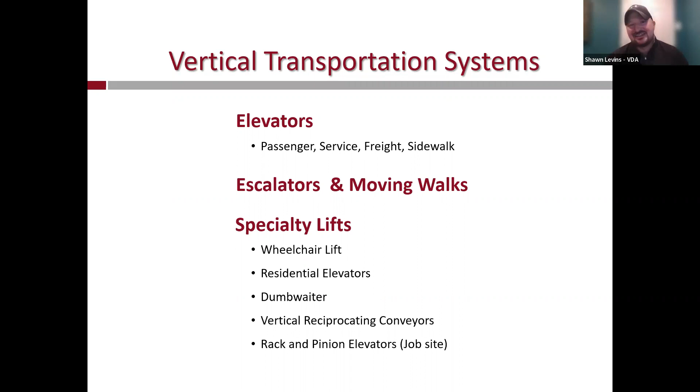All right, so going into the types of elevators, and don't worry, I'm going to share pictures of everything and explain these in better detail here. Hydraulic elevators are broken down into holed units, in-ground cylinders, and then you have your holeless elevators, right? Because somebody was like, digging a hole in the ground and putting hydraulic oil in it doesn't sound too good, so maybe we should think of something better. So they came up with the single and dual stage cylinders.

Also the rope cylinders as well, cantilever designs, which you may have not seen - they're pretty rare. Not a fan of these cantilever designs just because they're defying gravity and engineering, so they're definitely a rarity in this area. And then counterweighted hydraulic elevators, which is a proprietary type system - I'm not really going to go into it. It's more or less called the MRL, but spelled EMARALE, I believe, not MRL like the other machine roomless elevators. It's only from Mongrain Vertical Transportation, which is a Canadian company, so we don't really see that too often in this area. That was pretty much only in New York City that I've seen those.

Traction elevators - you have your geared traction elevators, which I'm pretty sure everybody's familiar with, and gearless traction elevators, which are more for your high rise. Pretty much what we're seeing installed today at 700 feet per minute and above, or building heights of around 300 feet of travel, more or less. And then the most popular, which I'm sure everybody's familiar with, in pretty much all new construction jobs these days, is all machine roomless, or MRL. But it's not technically machine roomless in Massachusetts, which I'll get to as well.

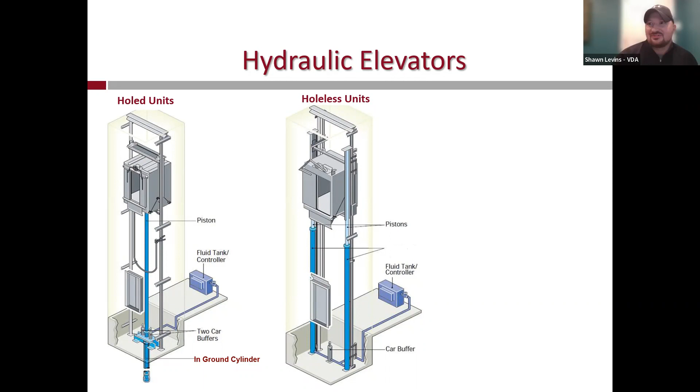Okay, so the next holeless type of hydraulic elevator is called the roped holeless hydraulic elevator. They mix a combination of traction ropes with hydraulic cylinders to gain additional travel. These can go up to 60 feet of travel, even higher by some manufacturers, though I wouldn't put them in higher than 50 feet personally.

It's another way of gaining additional travel with these elevators without going with the hole hydraulic cylinder. It's also a lot better environmentally because you're not digging into the ground, and digging that hole comes with its own problems—you never know what's going to happen down there. So the roped hydraulic is another solution.

A lot of times you'll see hydraulic elevators specified for freight type elevators because the capacities of those elevators are a lot higher, and hydraulic elevators can handle those higher capacities a lot better than your traditional MRL or overhead gearless or overhead geared.

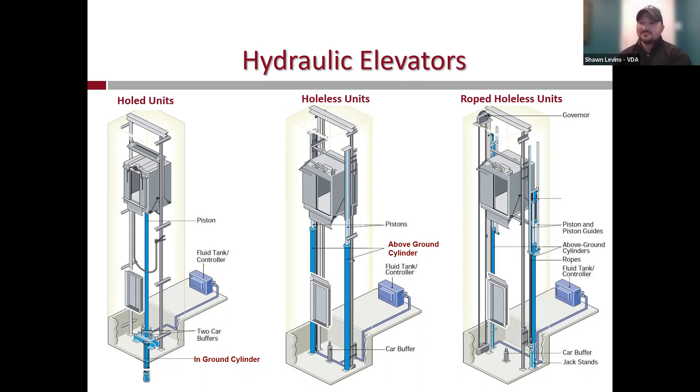Moving along, the next type of elevator system is called the geared elevator. Again, this is another existing elevator system that's in place widely throughout the area today. A lot of times you'll see these in a machine room connected with a DC motor and a DC alternating drive, so it's very energy inefficient.

It's a worm and gear drive as opposed to the new gearless, which is exactly how it sounds—more gears to accomplish one task, more or less. So it's not as efficient as the gearless, where it's just a single drive system.

These are still used today. You'll see them used for freight, basement traction elevators if you don't have the overhead, offset freight elevators and whatnot. But as far as a standard passenger elevator, they probably wouldn't be specified for anything in this local area.

Again, you have the machine located above. It can also be located in the basement, and offset is another option, but that's a little bit tricky, so I wouldn't recommend mentioning that to anybody, but they do get installed.

So again, moving forward with the traction elevator, you have the gearless elevator system, which is the newest technology. It's a drive sheave directly attached to the motor armature. It's an overhead type system, and it's the most efficient elevator overhead drive system that they have today. This is kind of where the MRL technology came from.

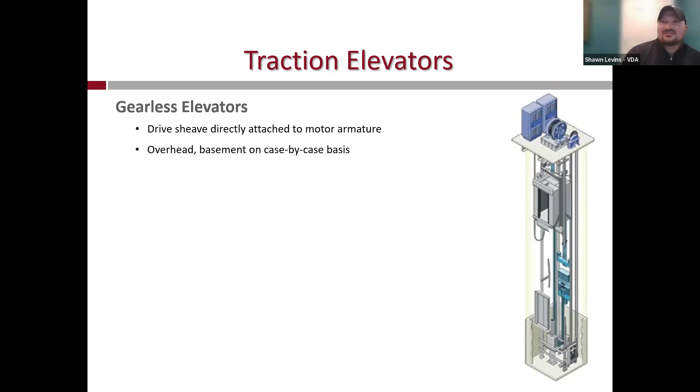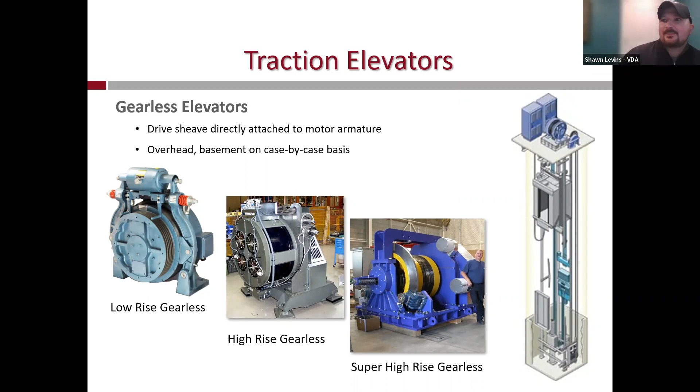Okay, now the most popular elevator, which I'm sure everybody's familiar with these days, is the machine roomless elevators, MRLs, except unless you're in Massachusetts, of course. But I'm still a big fan of the control room. They make a lot more sense than having the controller in the entrance frame.

So what they basically did is they took the traditional gearless type machines and downsized them, and put everything that was in that machine room into the hoistway, which gave it the term machine roomless. They also allowed for the controller to be mounted in the hoistway as well.

In some jurisdictions this is still allowed, mainly in the Midwest. It's banned in an abundance of jurisdictions—definitely Massachusetts, and then New York State, some areas around there. White Plains, New York kind of bans it, and New York City is a big proponent of having the machine room. California definitely, and things like that.

Again, this is just going through everything I've talked about: controller installed in a separate room. Here's some examples of what the machines kind of look like. You can see a few of the manufacturers have now moved away from the traditional steel core ropes, and they now have these belted or webbing type belt systems that they use to drive the traction machines.

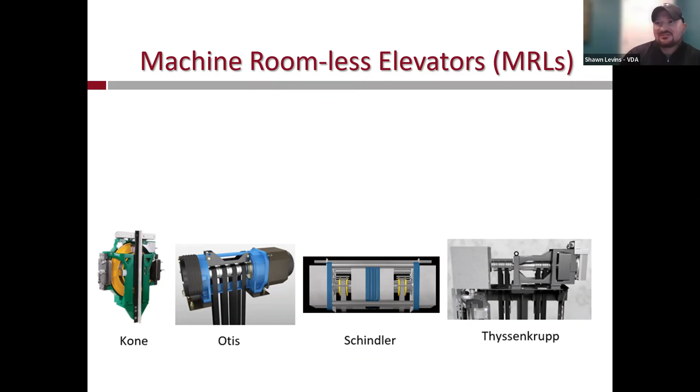And in Massachusetts, these all have to be fire rated, of course. So fire rated belts are pretty much used throughout the area. Connecticut, for a while, I was catching a few non-fire rated belts in which they wanted sprinklers in the hoistway, but in Massachusetts you're not allowed sprinklers in the hoistway, so they definitely have to go with the fire rated belts.

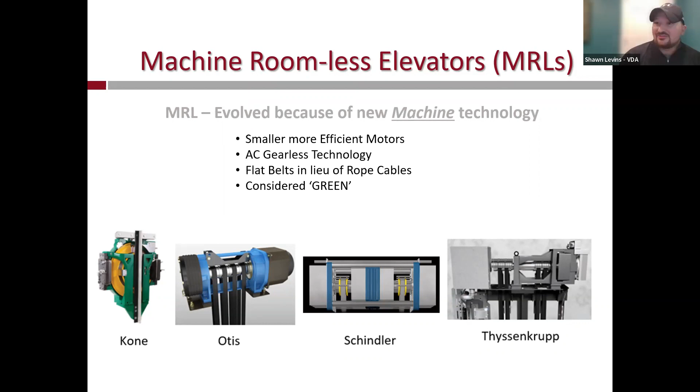Again, the MRL evolved because of the machine technology. You've got the smaller, more efficient machines for these lighter duty applications of the mid-rise and even the high-rise. They're also considered the green machines as opposed to the geared machines, and of course the hydraulic elevators.

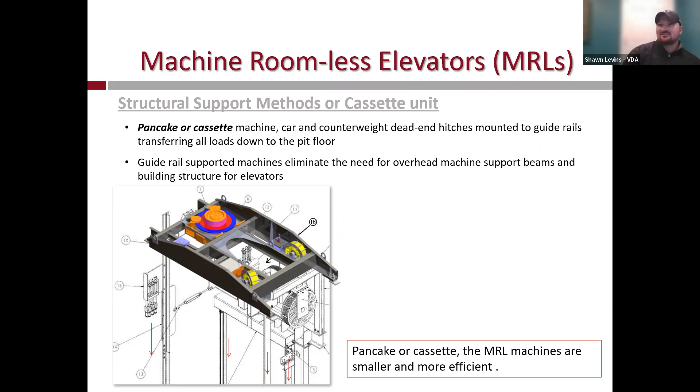This area is pretty much like an OEM dominant market, so your Otis, your TK Elevator, your Schindler, and your Kone are pretty much the dominant players for the new construction market here. You'll be seeing them pretty much on all the new construction projects.

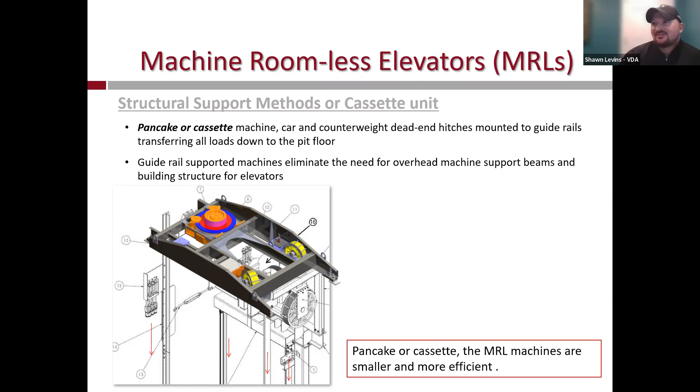And then you also have Stanley Elevator and Delta Beckwith, which are sister companies. Stanley Elevator is a sister company of TK Elevator, so they can install TK Elevator products, which is the Evolution product. And then you have the Otis Delta Beckwith Elevator, which is the sister company of Otis Elevator, which can install the Otis Underslung, the Otis Overslung, or the Otis Gen 3 Edge and Peak. They changed their name recently—they're always changing things on me. Keeps things interesting, I guess.

All right, so again, it's just going through what machine roomless actually means. It basically means that everything in the machine room is in the hoistway now, so you don't have to worry about creating that overhead machine room. You don't have to worry about providing overhead access, rooftop access, code compliant staircase to the roof, or anything like that.

This works good a lot of times when I'm doing feasibility studies for existing elevator hoistways where they want to rip out an existing machine and just put a new elevator in the hoistway, and they don't necessarily have code compliant rooftop access, which is very hard to do with an existing building, unless you're building a stair on the outside of the building, of course.

So they'll be favorable to the MRL design where you don't have to provide that kind of rooftop access. They'll usually have like a ship's ladder with a roof hatch, or the spiral staircases I've seen, all of which are not compliant at all. You're not allowed to have a roof hatch to access an elevator machine room.

Okay, some additional MRL notes. So with the MRL, with the OEM types of product lines, a lot of what their product lines are designed around is efficiency and a pre-engineered product. They have this assembly line system of pre-engineered equipment to keep cost low and provide you with a similar product to whatever everybody else is getting installed, more or less. So with that, you're not going to get too much variation. Customization of certain components is very difficult. They are very costly because they have to be subcontracted out to other vendors.

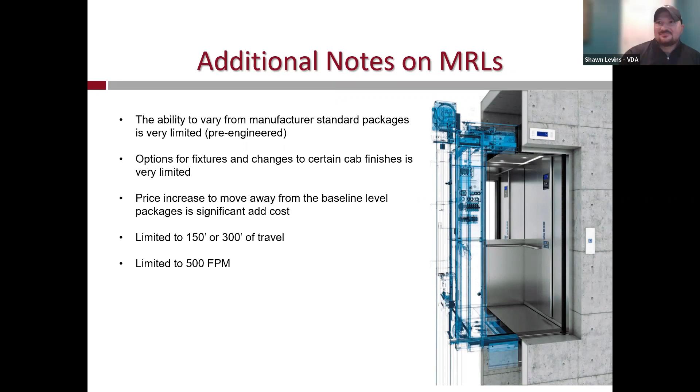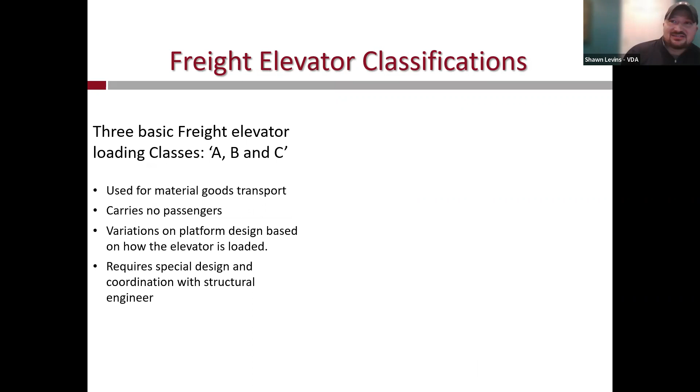Okay, so moving through to the freight elevator classifications. So you have the three basic classifications: A, B, and C. The most common one that you're going to see is Class A, of course. That's your passenger type usage. Here's a little rundown with the pictures.

So Class A and Class C3, with Class A being the most common, Class C3 being the second most common, and then you have your Class B, C1, C2. Those are more or less for freight loading. Those are not for passenger type usage. So they don't meet ADA compliance, and they're not designed for passenger type use. So they don't have the same safety features with the doors and whatnot.

You have the biparting doors. However, with the Class A freight loading, which is for your general passenger use, that's rated for the passengers. And then your Class C3 is kind of a combination between the freight and the Class A. So it's a little bit of a branch there where you're allowed more concentrated loading than the Class A, and you're still allowed passenger use, but you're not allowed to carry any forklifts or vehicles or anything like that on there, of course.

A little bit of information: Class A is actually rated on these elevators designed around passenger use. So when you see like a 5,000 pound elevator, it's actually designed around how many passengers can fit in a 5,000 pound elevator, as opposed to how much can be loaded. So when you load a 5,000 pound elevator, you're only allowed a single load of 1,250 pounds, exactly 25% of the total capacity. Whereas if you had C3 loading, what they do is they stiffen up the sills, they stiffen up the bottom of the car sling, and you're allowed a total single load item of 5,000 pounds.

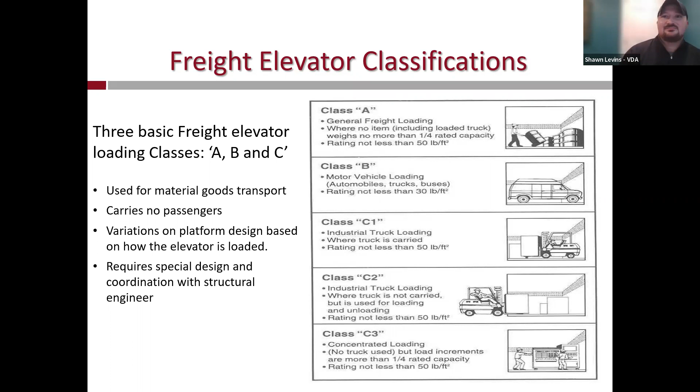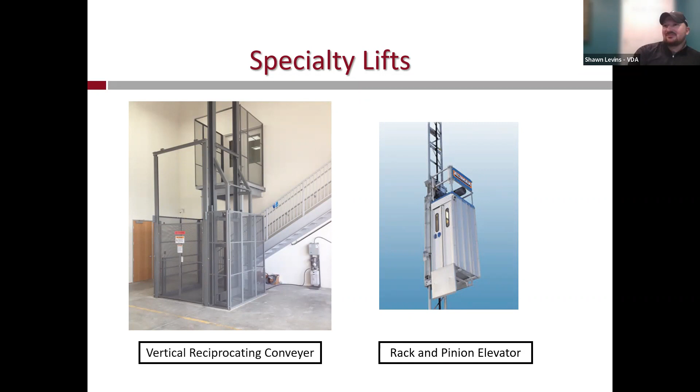All right, so just going over the elevator operation requirements and components.

Your basic elevator control operation systems are: constant pressure, which you're going to see on wheelchair lifts; two-stop operation, which is exactly how it sounds, more for a two-stop hydraulic elevator; simplex selective collective, which is your more popular one - that's if you have a single elevator serving 2 or more floors; duplex selective collective, which is 2 elevators working off of 1 riser; and automatic group, which is a group of 3 or more elevators working off of a single riser. Then you have your destination dispatch system, which some people may be familiar with. It's becoming more popular throughout the Boston area, especially in office buildings - pretty much all office buildings are being installed with that today.

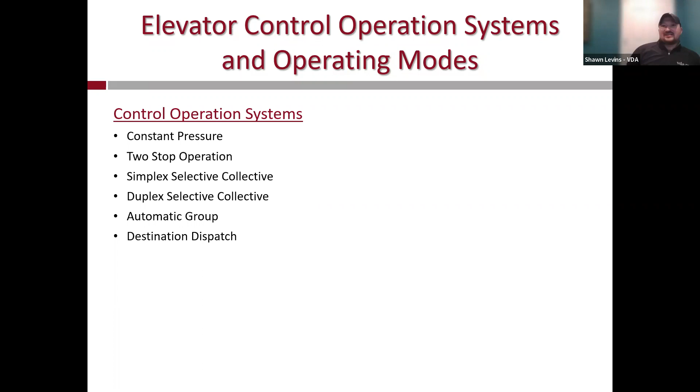Various operating modes are: attendant service, which I don't think you'll ever see unless you're on an older freight elevator or something like that; independent service, which is provided for the building to take that elevator out and use it for service needs as required; inspection service, which is for the elevator mechanic to run that elevator at a certain speed - it's basically the same as independent service, so most of the time you'll just have the independent service switch in there, they never really install the inspection service; firefighter emergency operation, phase 1, phase 2, again code required operation, I'm sure everybody's familiar with that; and swing car operation, which is very popular nowadays, especially with the requirement for the 2 fire service access elevators.

So frequently what they're doing is they're putting two service type elevators in your main passenger core, and you want to be able to utilize those service elevators for what they're designed for, which is service type use. So they'll be on what's called a swing car operation, which will pull one of those cars out of that bank and operate on a riser separate from the group riser. It's usually on a key switch, designed for building use only. When you activate that key switch, the riser call buttons will pull that car out of the group, and it'll operate independently of that group.

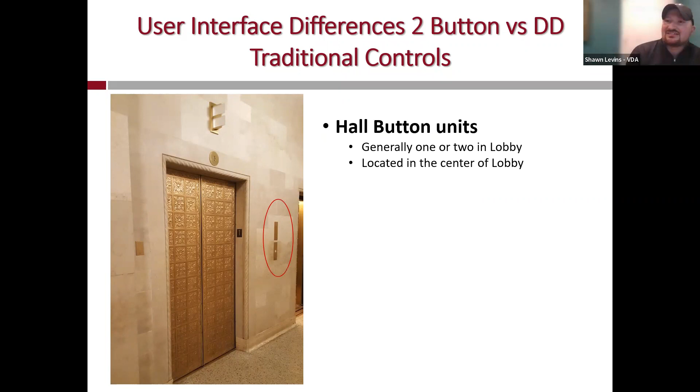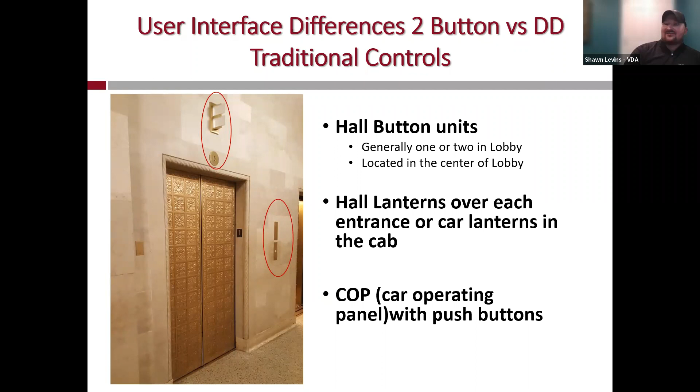So this is just going over the interface to show the difference between conventional dispatch and destination dispatch. With your conventional dispatch, you have your regular hall push buttons, so you have to physically touch that push button to call the elevator or register a call. Then you either have the hall lanterns or car lanterns light up, which achieves your ADA provisions by providing a direction of travel. Inside the car operating panel, you have the push buttons to activate which floor you want to go to.

And again, that's the most common type of elevator control system. Calls are placed at the push button station in the hall. Destinations are chosen from inside the elevator. You can have multiple people going to different floors and they can each select which floor they want to go to.

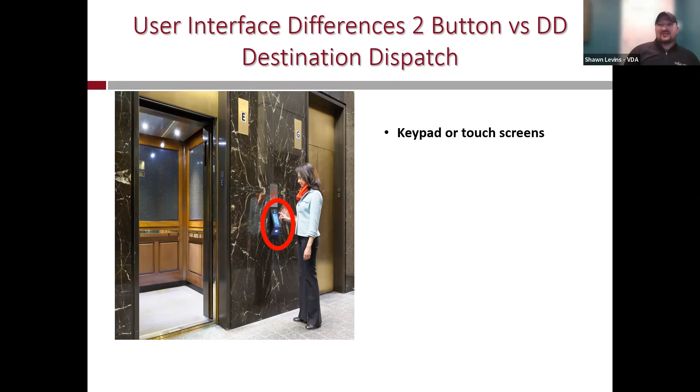Versus the newer, smarter technology, which basically consolidates people going to similar floors. This is called destination dispatch technology, which consists of this keypad. It's more or less like an iPad touch screen. They can even operate off of just a card swipe where you can swipe the card and it'll take you to your pre-programmed destination floor. If you needed to change it, you can hold the card over the card reader device and it'll allow you to select from different floors. So it's kind of like a touchless technology, more or less.

So we saw a lot of people interested in this type of technology during the wake of COVID and whatnot. But once they saw the price tag of adding destination dispatch to their systems, they kind of deferred from it and went back to the conventional dispatch. However, if they had an office building over 10 floors, they were probably putting in this system just because it's becoming the norm, especially in the city of Boston.

Your typical floors have fewer units because you're not seeing as many people using the elevators at the same time as you would at the main lobby, where you'll have that heavy influx of people at one point in time. Your main lobby is going to have as many as 3 to 4 devices, depending on how many elevators you have in a bank and how spread out they are.

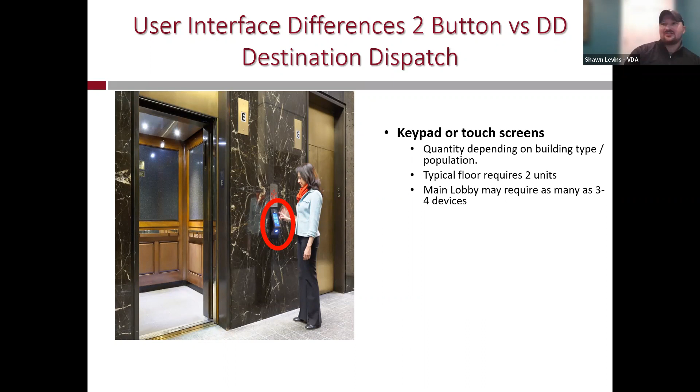The main goal when designing for these destination dispatch fixtures is to not allow for a backup of traffic. If somebody has to wait in front of that push button station and there isn't one actively available, and then you have people backing up on top of that blocking elevator entrance doors, it creates a traffic jam in your elevator lobby, which is not good from a traffic analysis standpoint or an experience standpoint. So you definitely want to try to avoid that at all costs.

Another item that comes with the destination dispatch system is your static or dynamic car identification system. It's not code required to have these light up, it just has to be located adjacent to the elevator entrance frame. The code doesn't define too much criteria for these, but I think they should probably light up since that's a lot easier for people to see. However, the standard ones from the OEMs tend to be pretty atrocious looking, so a lot of times architects will come up with their own custom signage posted above each elevator entrance landing. It's also cheaper that way, since it takes that scope out of the elevator contractor's scope.

Another additional item is your car jamb registration indicator, which is for your ADA provisions, with additional braille signage to indicate which elevator it is. The biggest issue is people press the destination dispatch touchscreen and then forget which elevator they're going on. Everybody's human, they've got a million things on their mind, especially these days. So you want to make sure that elevator is adequately provided with signage that indicates which floor that elevator is going to on the jamb. When the doors open, they'll see the elevator is going to their indicated floor, giving them confirmation, as well as the elevator identification number. You also want additional pads there, because frequently with turnstiles, people swipe their card, forget which car it was read, so you want additional stations so they can press the button again and register another car.

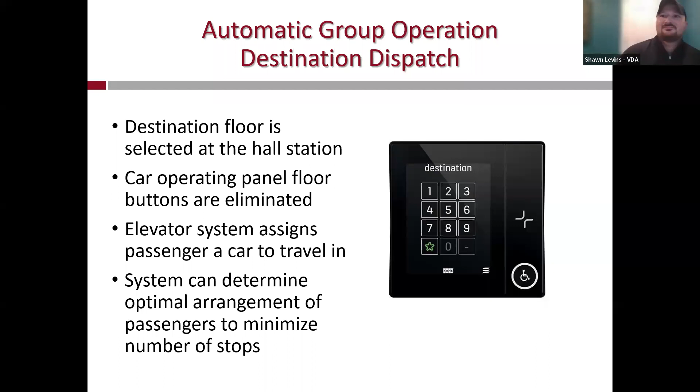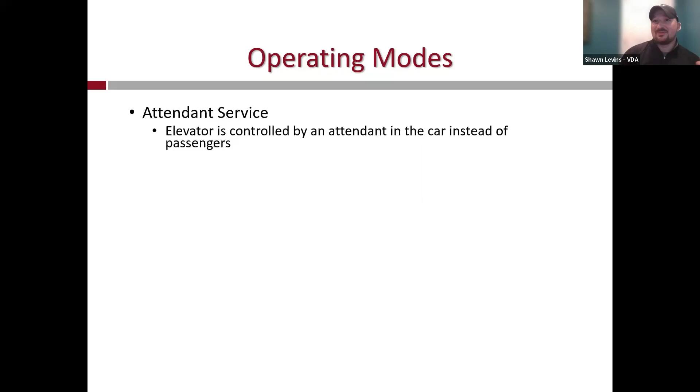Now going through the various operation modes. Attendant service is exactly how it sounds, a car controlled by an attendant, but it's very rare, you won't see that in any passenger cars. Even when the elevator is used for construction, that's not attendant service, it's more like an attendant operating the car, but it doesn't have the push buttons - he just has the car on independent service and operates it that way.

So that's independent service - it's a constant pressure type operating system, so you have to hold down that button to get the car to operate. I don't know if anybody's seen the attendant on construction use elevators do that, but if you're wondering why he's holding down the button, that's what he needs to do to get those cars to respond.

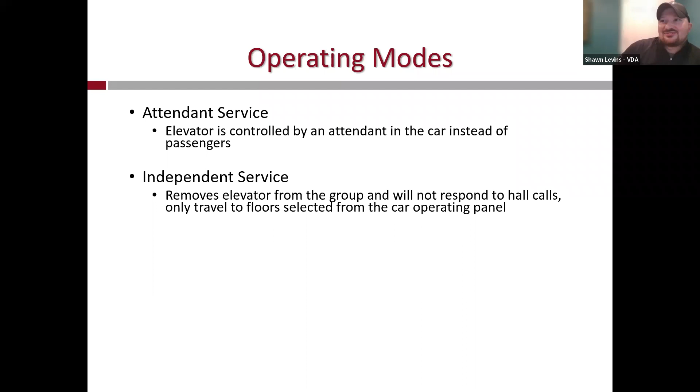Inspection service is basically the same thing as independent, it just limits the speed a bit more, and again that's used for technicians. Your hoistway access operation is used for technicians working on the elevators - for their safety, they want to make sure they can access the elevator pit, the elevator overhead, and ride the car up and down the shaft as needed. That's provided through a key switch at the terminal landings, your lower and upper landings.

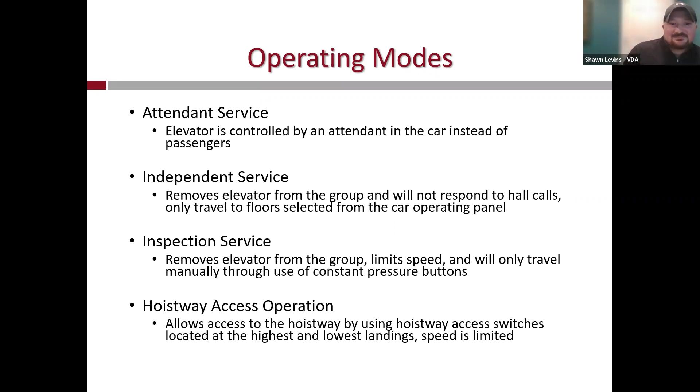But definitely not for regular passenger type use. Swing car operation, which I discussed, will take an elevator out of a group so that we can use it on a separate set of risers. It's good for when you have a service car and a passenger bank, or if you have an elevator serving another floor. Another way around this is to install a destination dispatch system.

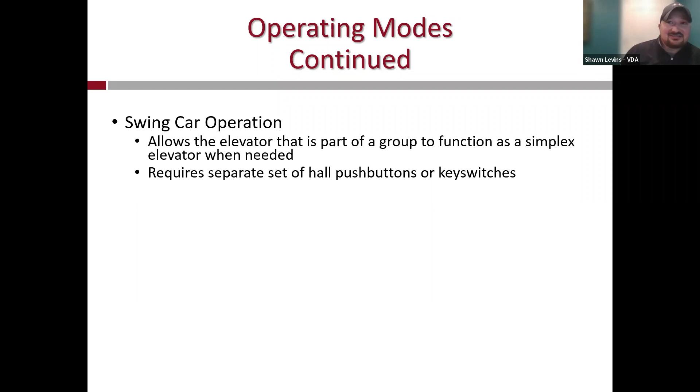That is another option. Executive priority service - again, I went over this - provides express mode to your destination floor, generally used for VIPs and whatnot. Not very popular, I haven't done too many of those around here. And your hospital emergency service operation is required on one elevator that serves all floors of the building for every single new construction building, and if I can, I will put it on existing buildings as well.

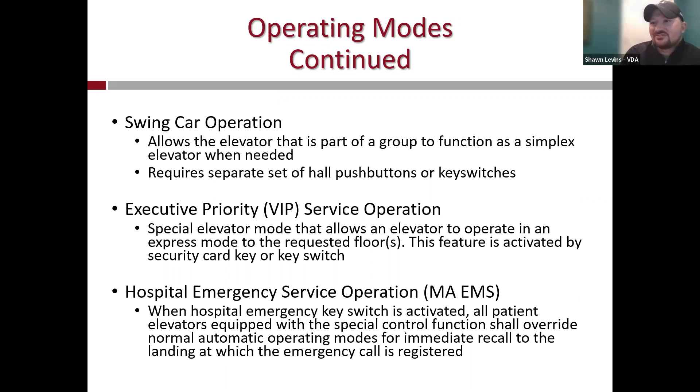So this is going through your firefighter's emergency operation, which is a code requirement. It's divided into phase 1, phase 2 operation. Phase 1 being at the main recall call switch, phase 2 being at the car station.

I also like to put the phase 1 call switch in the fire command center for all buildings, especially if you have a high rise, or what I'd like to define as a building code high rise, which is above 75 feet. Not the Massachusetts high rise above 70 feet.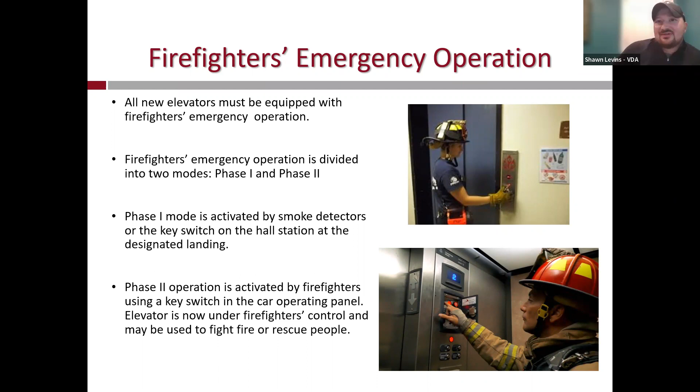And a big thing that came in with the 9th code edition, which I'm sure a lot of architects felt, is the fire service access elevator requirements. Which is required for a building with an occupied floor more than 120 feet. You need 2 fire service access elevators that service all floors.

And hopefully they change that. I know they're looking in the 10th to change it to the below garage levels, or from the lowest floor from fire department access, so you don't have those fire service access elevators serving the garage areas anymore.

It does make things a little tricky from a traffic analysis standpoint, because you're kind of creating multiple lobbies. Generally with a traffic analysis, you want to have that single lobby at floor 1. You don't want the elevators going down into the parking garage and picking people up. From an efficiency and traffic analysis standpoint, it definitely works a lot better that way.

All right, and here's the code section I was discussing. Every floor of the building—I've seen the later versions of the code and they seem to have changed that, which is good. It's definitely coming up on a few of my projects that they're expecting construction under the 10th. They're trying to predetermine what that's going to be and try to save some costs on those service elevators.

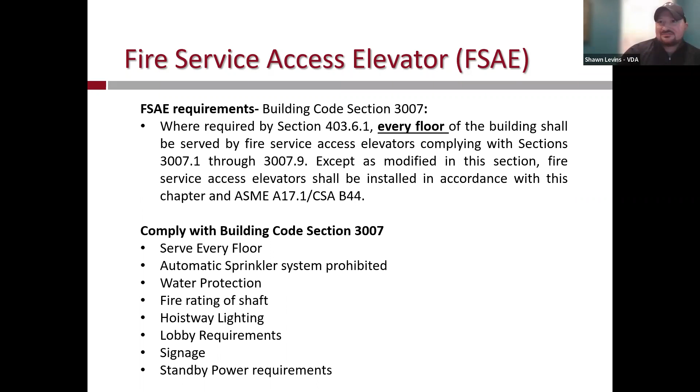Going through the minimum ADA requirements—so it's pretty much a 2,000 pound capacity, or as the industry says, 2,100 pound capacity. Probably won't see them that small here. Their 2,500 pound capacity is more for the smaller type elevators.

But because Massachusetts requires the stretcher requirement for every single elevator, you're pretty much locked into either the 3,500 pound car or the 4,000 pound car. And then, sorry, I skipped over that one—for existing construction, it's a little bit different. You're allowed a little bit more leeway there, but the clear inside dimensions cannot be smaller than 48 by 48.

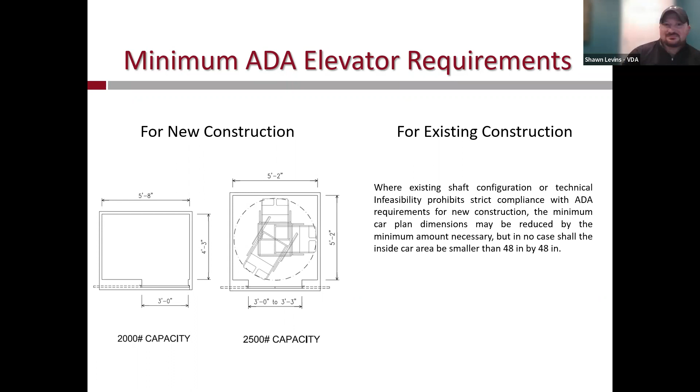And here's a basic diagram of what the stretcher handling elevators kind of look like. So you have your basic 84-inch stretcher compliant elevators.

Which are your 3,500 pound and your 4,000 pound elevators. A lot of architects like the center opening doors. I like them too, especially because they're the fastest operating doors in the industry. So from a traffic analysis standpoint, they open and close the fastest, and that's going to really affect your floor to floor times and make that elevator a lot more of an efficient driving system.

So the 4,000 pound car is definitely the more popular choice. And if you wanted to just get away with a smaller car, which is roughly exactly 1 foot less in width, that's your 3,500 pound car. So it's 6'8" for the 3,500 pound car in width, and then 7'8" for the 4,000 pound car in width.

And then the 76-inch stretcher is not around at all today. I haven't seen it in a while. That is not allowed for new construction under most areas. I think Maine actually has one area where they still fall under the 76-inch stretcher code, but I'm sure they're going to update that soon enough.

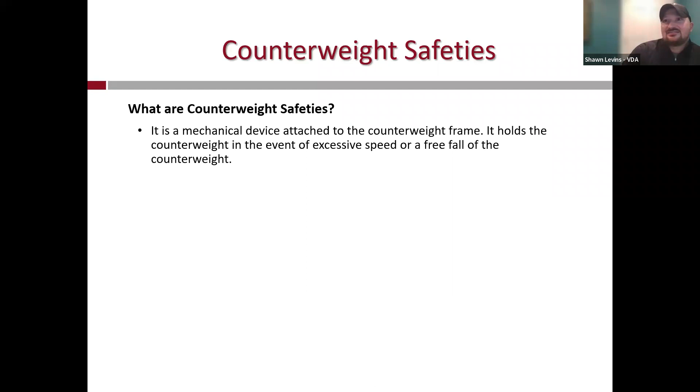However, when you do provide the counterweight safeties, one thing to note is that it does add dimensional increases to whichever side the counterweight is on. So it's either side counterweight or a rear counterweight, whichever is being designed, is actually going to increase the size of the hoistway. And then some manufacturers require actually a deeper pit or more overhead to account for the counterweight as well.

And then in addition to that, you're also going to have additional loads that are going to transfer down those counterweight rails when that safety is applied to the counterweight, that are going to transfer down to the pit, that need to be accounted for structurally as well. If you're working with a very tight pit with pile caps and everything else, that can sometimes be an issue, because structural is not necessarily keen on seeing that.

It's not too common to have the counterweight safeties. They're usually just used to seeing the safeties applied to the car rails. So that does come up from time to time.

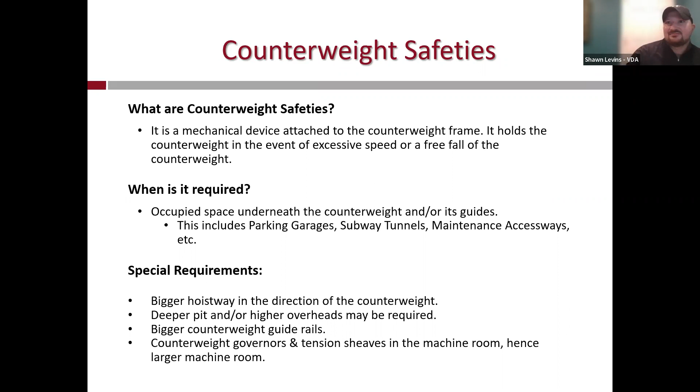All right, getting into elevator cabs. I'm just going to go through all these sections here just to talk through them real quick. So I think the best way to kind of go over the elevator cabs is to talk about what's actually part of the pre-engineered products from the OEMs, and what can be easily customized. I get this question a lot from the designers on the various projects that I work on.

So the front returns, doors, right? It's a shame you can't really see my mouse here, but front returns and doors and transoms are what's comprised of the car station. So it's basically the front of the elevator, and this is what's missed most times when you provide an architectural drawing. People tend to forget about this wall because they think of the cab in terms of the 3 walls, or 2 walls if you have a front-rear opening, and then just the ceiling.

However, this is the hardest part to customize from those manufacturers. It can be done, you can do like a powder coated finish, or you can get custom metal, stainless, bronze. A black and stainless steel is another popular one.

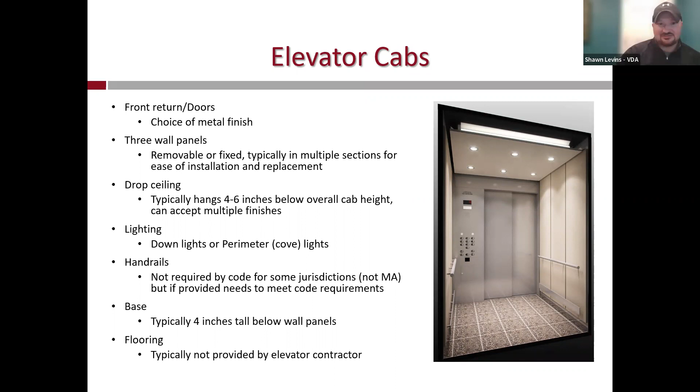All right, moving along with the car operating panel. A big pet peeve of mine is this no smoking engraving on these car operating panels. They're definitely not required. You're not allowed to smoke in the building these days, so why would they have it on the car station? Every single job that I do, that no smoking sign ends up on the shop drawings, and I usually mark it up to be removed. I think it looks much better with a cleaner look, as opposed to having that big ugly no smoking sign, especially if you're paying for this expensive elevator. You don't want that big ugly thing sticking out there.

Another component of it is the car position indicator, right? So you see that red arrow with the number on it. That's your position indicator, determining where the car is in the actual hoistway and with regards to the elevator landings, right? That's all required by code.

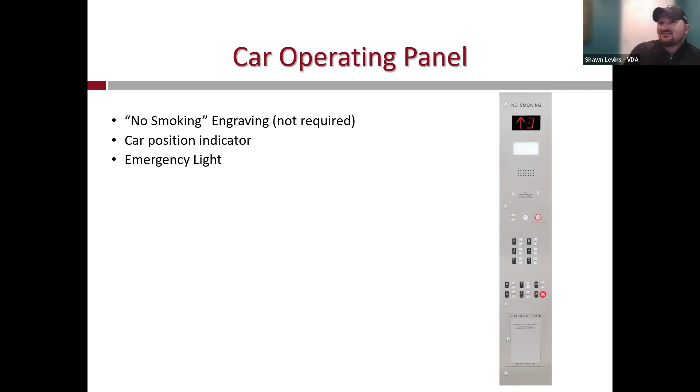The same with your emergency light. Some places you can get the emergency light in the actual ceiling lights, which again provides for a cleaner COP panel. It's a little difficult from the OEM, so we don't see that too often around here. Some of them have kind of a slimline light that doesn't look as bad as that one, but generally they're all provided in the car station there.

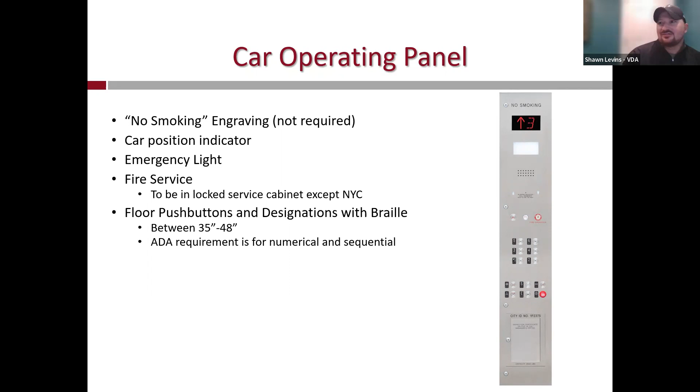You have your fire service cabinet. This one appears to be an older generation car station that they're showing there, because you need the additional cabinet for all those key switches and whatnot.

You have to update that, but in addition to that, you have your floor push buttons, right? Braille, which is required per ADA. Your push buttons are required to be at certain heights, certain reach requirements, 35 inches to 48 inches, right?

And then Massachusetts specifically, you have to have a 35 inches on center to the car alarm button, and also the car stop switch, which has to be keyed. Door open and close buttons. Sometimes you'll see a door hold button.

It usually tends to mess up the layout of the buttons, so I try not to put the door hold button on a lot of my jobs. It kind of ends up being this one single odd button that will mess up the nice layout there. So they tend not to go on there. I don't think they work anyway. Every single one that I've ever tested usually isn't hooked up. So I think it's just for people to pound and hit on to make themselves feel better about the elevator doing something right.

Emergency communication and alarm button. We talked about that. So the alarm button has to be 35 inches per Mass. And then your emergency communication button, which is basically the phone. Everything's wireless communication now with the phone integrated into the car station.

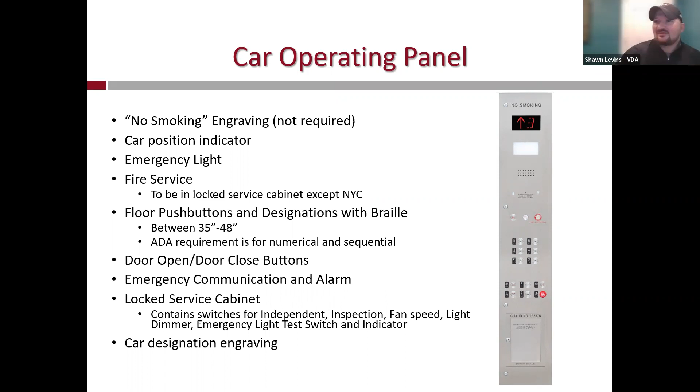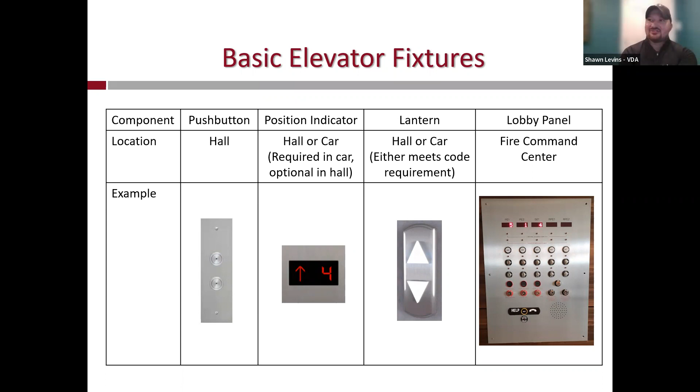Next is the fire command center panel, generally provided for elevators in buildings above 120 feet of travel, or if you have multiple elevators, multiple banks, emergency power, a lot of stuff going on there, we'll usually always spec that fire command panel. That's going to contain your position indicators, your indicators on emergency power, whether the car is operating on emergency power or not. If there's multiple cars within a bank, it'll allow you to switch between those banks for the emergency power. You'll also have your fireman's phase 1 emergency service. Frequently, I'll put the car to lobby key switch on there so you can call the elevator down manually if you want. And then you also have your car at lobby indicator light.

All right, how are we doing on time here? Pretty good, right? Do we have until 10? Okay, yeah, we have until 10. So you've got a little bit of time still, Shawn.

All right, so going over the basic elevator applications, capacities, and speeds. Your passenger elevator capacities, your standard passenger elevator, generally used for passenger type usage, for moving large amounts of people, not used for service type usage and whatnot. That's your 2,000 pounds to 4,000 pound type elevators, standardized throughout the OEMs. And then you have your service elevator capacities, which start at 4,500 and go all the way up to 5,000 pounds, and then 5,000 pounds AIA if you need that extra foot. The extra foot helps out frequently with electric bikes these days, they seem to be like 9 feet in length, so you definitely want to spec that larger elevator.

Hydraulic elevators are limited in speed, 50 to 175 feet per minute, they don't go too fast. Your gear traction elevators go 150 to 350 feet per minute. MRL speeds go 150 to 500 feet per minute, 500 feet per minute is kind of where they top out. And then your gearless traction elevator systems go from 500 all the way up to 2,000 feet per minute.

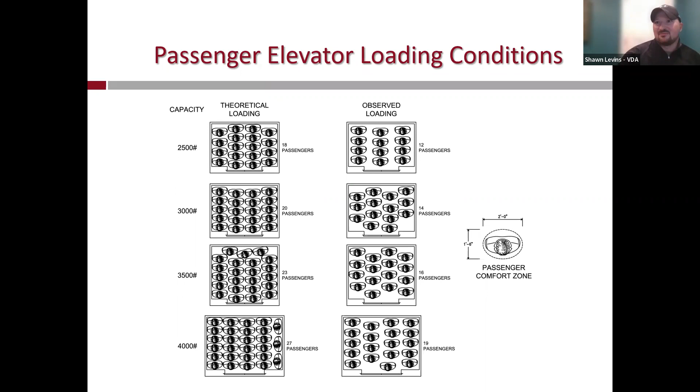So the capacity isn't necessarily how much weight can be handled by the elevator, it's how many passengers can actually fit in the elevator. They use the capacity divided by 165 pounds, and that's kind of where you get the rough estimate of how many people are going to be in there. I'll get into this a little more when we talk about the traffic analysis.

So the hydraulic elevators definitely have their use in the market. However, it's kind of like a dying market trend. A lot of people are moving towards the gearless, moving towards the MRLs. The cost of the MRLs these days versus the hydraulic elevators is about one and the same. There's not much difference between a standard holeless hydraulic elevator and a 2-stop MRL elevator.

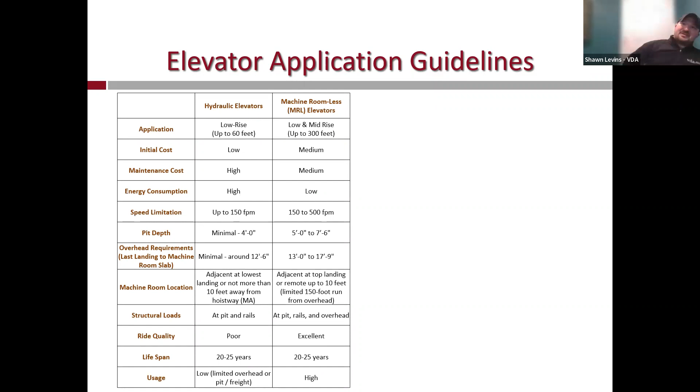Comparing that to the machine roomless elevator, I can go 150 feet per minute to 500 feet per minute, up to 300 feet of travel. Your pit depth and overhead, of course, is going to be increased a little bit more. However, that's generally not an issue for most applications. If you do have an issue with overhead and pit depth, there are options. There's something called a collapsible toe guard, which you can install on the machine roomless elevator. Some jurisdictions like Connecticut actually allow Otis Elevator to install a 4-foot pit on their MRL traction elevator. Not here in Massachusetts, of course, but there are some available options there.

Then you have your gearless traction elevators, which are more or less used when you get into that 700 feet per minute that you need to meet the traffic analysis demand. So if you don't have enough elevators, or can't provide enough in your core, and you need that extra speed to get everybody moving throughout the building, this is where the gearless traction elevators really stand out. They're used for freight type usage, higher ranges of travel, these higher buildings above 300 feet for high-rise buildings, which we don't really see too often here.

And then you have your gear traction elevators, which are generally used for your freight, low rise, 150 feet per minute. Some manufacturers, or some clients, actually prefer the geared and the gearless elevators, so you'll see them spec it. They don't like the MRL, the OEM type equipment. They want to go with what's called non-proprietary in the industry.

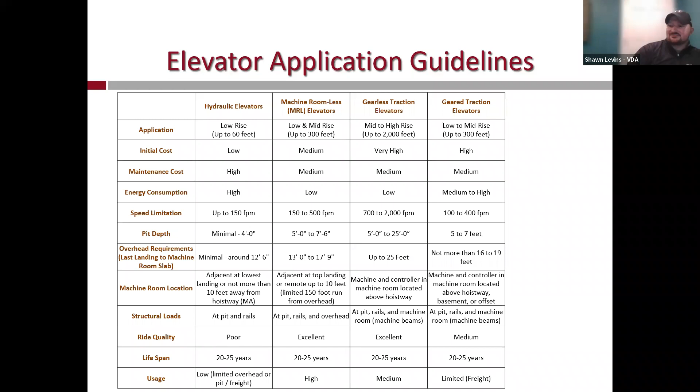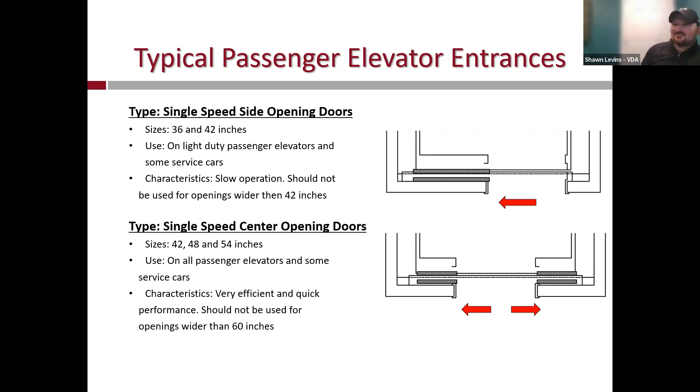This is going through the passenger elevator entrances. These are your two basic types of entrances, your 36 and your 42-inch single speed side opening doors, and then your 42, 48, 54-inch center opening doors. The industry standard though is the 36 and the 42 side opening doors, and your 42 and 48 center opening doors. The center opening doors are probably the most popular, because they're the fastest in the industry, so from a traffic analysis standpoint, they definitely stand out.

And then you also have your 2-speed side opening doors, 2-speed center opening doors. Generally, the 2-speed side opening door is popular on your 4,500, 5,000 pound AIA type service elevators. The 2-speed center opening doors you won't see unless you're working with a custom type of elevator, to get the wider elevator doors.

And then if you want to get really creative, you have something called the 3-speed side opening doors, which I don't think anybody's seen here, and I definitely would not recommend, because they look like a mechanical nightmare. I've only used them in special case by case scenarios, where I've had elevators too small, and too small of a shaft that can actually fit the 2-speed doors, so I have to use the 3-speed doors. They do not work well at all. You have a lot of issues, a lot of downtime on the elevator. I haven't seen anything like that around here.

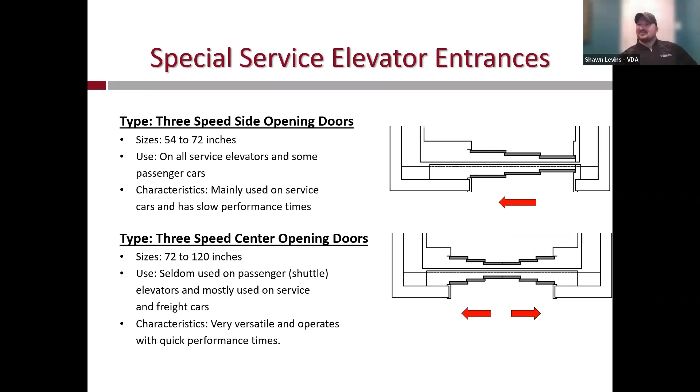But there are some applications, mainly in New York City, when they were building up those rundown areas. A lot of times they didn't want to replace these elevators, so they were stuck with the smallest elevators. You can barely fit a single person in there, and they have to meet passenger requirements, so you have to stick those 3-speed doors on there. But I wouldn't bring them up though.

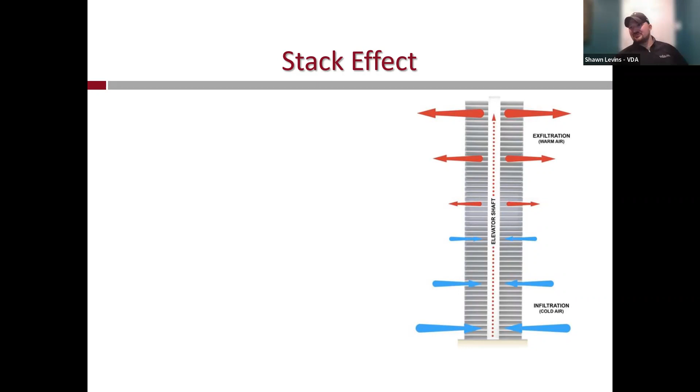All right, so here we're going over some building considerations. A big thing you may have come across is what's called stack effect. It's basically the cool air coming in and the warm air trying to get out of the building. It creates a lot of chattering of the elevator doors and degrades your elevator ride quality, because it creates too much pressure within the elevator shaft.

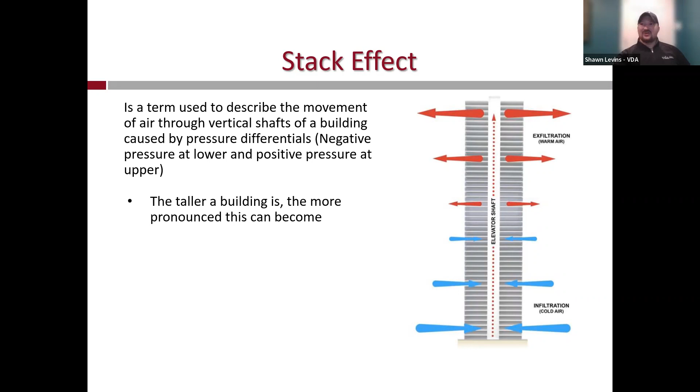It's basically that movement of pressure - negative pressure at the lower levels with the cool air, positive pressure at the upper levels. It's more pronounced the taller the building is. I haven't come across it too much in this area, but the buildings are getting higher and higher around here, so you get greater temperature differentials.

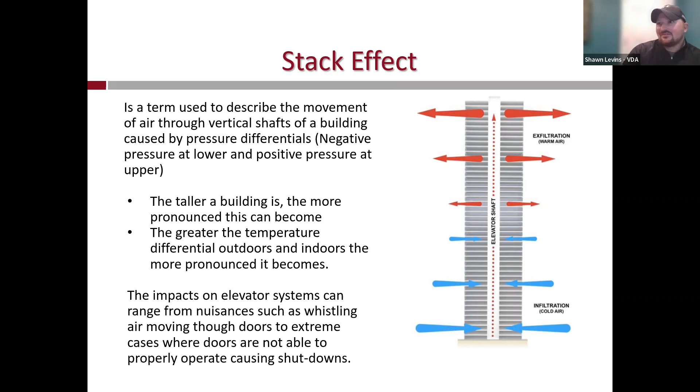You'll get that whistling sound, again the chattering of the doors and whatnot. In some cases it can actually be so bad that it'll shut down the elevator, because the elevator is moving too much to where the safety devices can't register or activate correctly. And that causes issues.

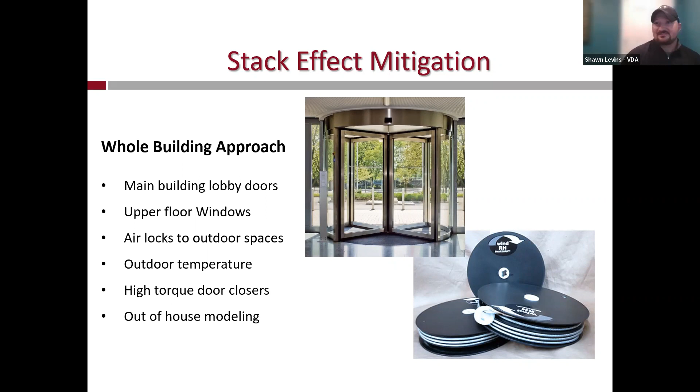The easiest way to prevent this is to have those revolving type doors there at the lobby. So you don't want any open windows or anything like that at your main lobby to mitigate that cool air from coming in and taking over the building. That's the purpose of airlocks to the outside there. You also want to limit the open windows on your upper floors as well.

The second item is what's called the piston effect. Again, this is another high-rise application where you see like a single or even a duplex elevator within a single shaft. As the elevator moves through the shaft, it creates a piston effect, where it's pushing a lot of that air through the shafts, causing chattering of the doors, the elevator to act erratically, and degrading your ride quality, because that air is trying to escape as the elevator pushes through, similar to how a plunger works through a shaft.

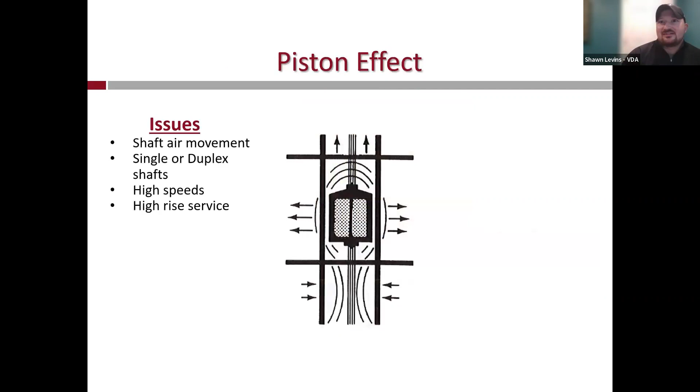Sorry, went back there. Again, that's for high speed - whistling through the entrances, noise, degraded ride quality. A way to mitigate that is to create a larger shaft.

It's pretty common - not so much anymore, but before the two fire service access elevator requirements - you just had the single service elevator, the fire service access elevator, for a really tall building, because it's generally separate from your passenger elevator bank. You'd get this condition where you'd have this single elevator going all the way up 300, 400 feet of travel, and then trying to escape all that air.

So a way around this is to oversize the elevator shaft, and then provide relief vents throughout the shaftway as the elevator goes through.

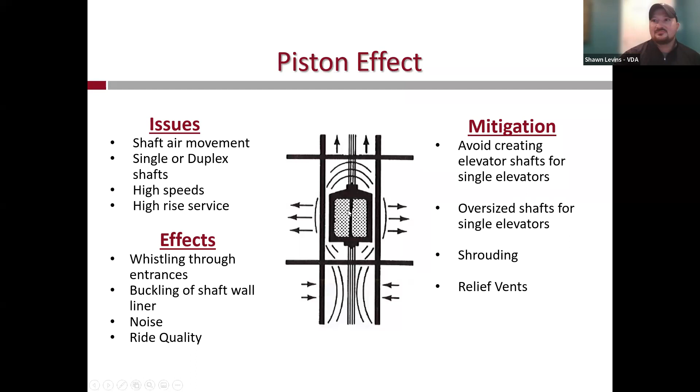Sorry, another meeting popped up here.

All right, so wind sway is another condition. Again, we generally don't see it here - we don't see buildings in excess of 450 feet too often here.

So basically, a way to mitigate this is the elevators are provided with sensors to compensate for the wind sway of the building. Or if there's a very windy day, it'll actually shut down the elevator, or shut down a number of elevators, so that the elevators can operate correctly.

Every day in Massachusetts seems to be a windy day, apparently. So it would be pretty common if we had these tall buildings here, but luckily they're not too common here.

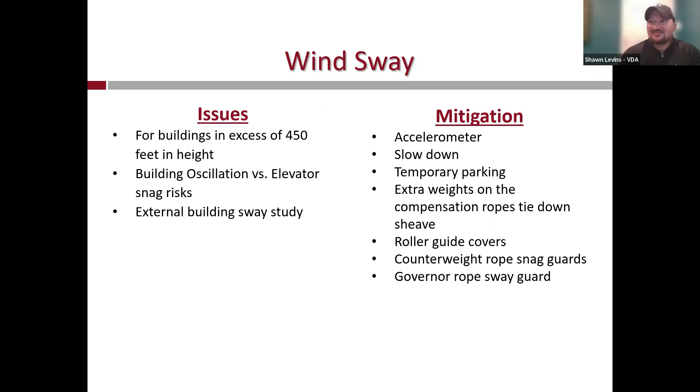All right, getting over to escalators and moving walks here.

Your basic escalator comes in 24, 32, and 40-inch step widths. The difference between step widths is how many people you can fit on each step. The 40-inch is probably the most popular, where you can fit 2 people side by side. Then 32-inch is the second most popular, where you can fit 1 person with baggage, and 1 person each step again with their baggage.

Popular for airports. Standard speed is 100 feet per minute. Your rise is up to 20 feet standard without intermediate support. Vertical incline is a standard throughout, and the code is 30 degrees.

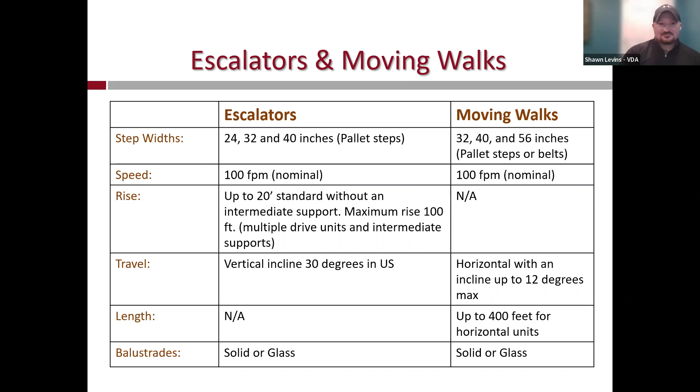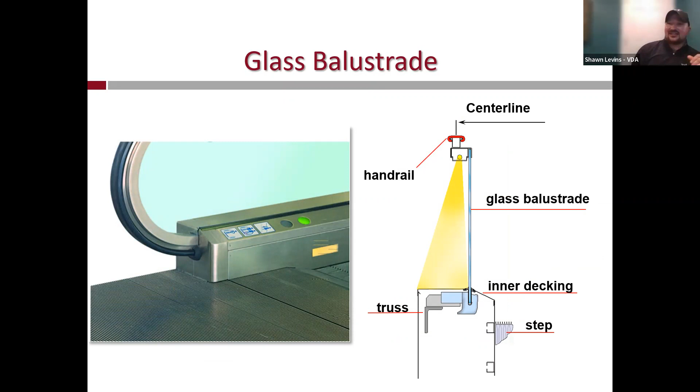Frequently what they do is clad the outside of these escalators, which provides a really nice appearance and look. They'll usually clad the outside, and they'll do specialty cladding on the inside where the skirt is, shown right there on the bottom. The glass balustrades are also pretty nice.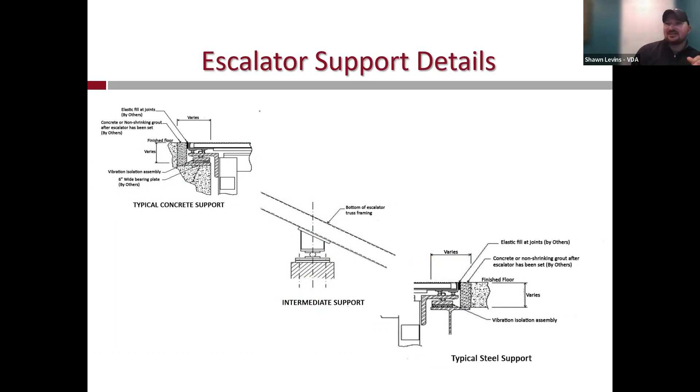Getting into the escalator support details—escalators are rather simple, basically a drop-and-play type device. You have your support at the upper end and your support at the lower end, which changes and varies per each manufacturer, with seismic supports for each of those upper and lower ends. Then if your travel is high enough, you have what's called intermediate support, which goes in between the escalators.

Your safety zone requirements per ASME A17.1 require a safety zone in front of the escalators. There are specific code requirements, which drill down to no less than the width between the center lines of the handrails plus 8 inches for total width. For the length, it's no less than twice the distance between the center lines of the handrails. This varies per manufacturer, but generally between 6'6" and 7'6".

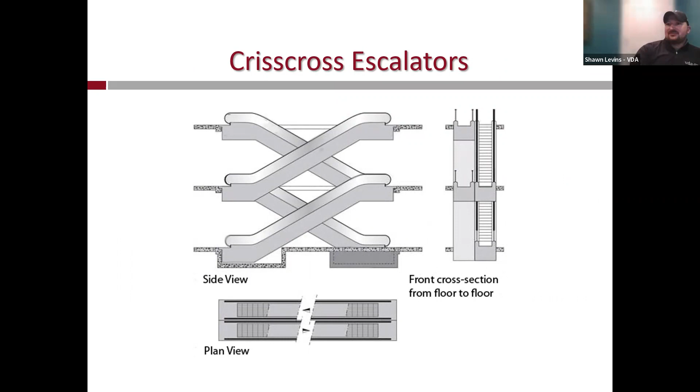Here's a bit of application for each of the escalators. You can have that crisscross type situation, which is pretty popular, or you can have a parallel stacked type arrangement.

All right. Working through time here.

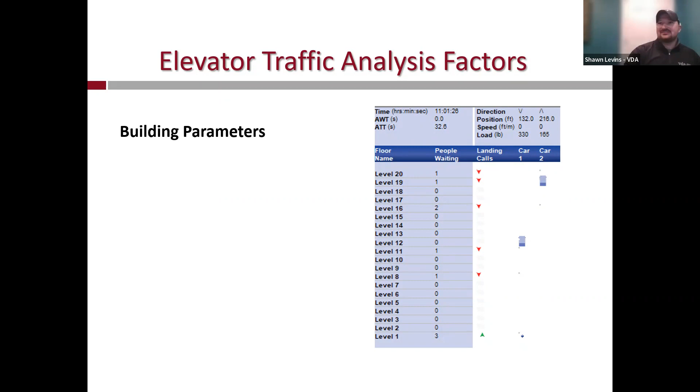I'm going to go through the elevator traffic analysis portion pretty quickly. Basically, when conducting the elevator traffic analysis, the biggest things that come into play are your floor-to-floor heights and your total travel, as well as your population per floor, and of course your population density.

A lot of times people compare buildings to other buildings, but these are very important factors that differ per building and significantly impact overall waiting times. You may be close on one building, but in this building your floor-to-floor heights are 18 feet as opposed to 15 feet, and it's going to significantly change everything.

The design criteria for these is basically your average waiting time or your interval. There are two different levels of measurement—these are the basic levels of measurement for your elevator traffic analysis—and also your average time to destination, and also your car loading. I'll go through all those.

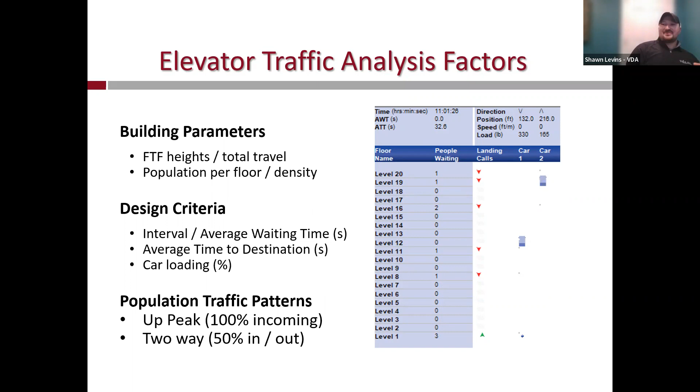Another big consideration is your population traffic patterns. All this comes into play with arrival time fluctuations, absenteeism, weather, flexible work times, people working from home—maybe not at 100% capacity, especially nowadays—counterflow of traffic, cafeteria, meeting rooms, libraries, all that stuff comes into play here.

This just basically goes through the interval. For this area, the architects around here are pretty familiar with the average waiting time.

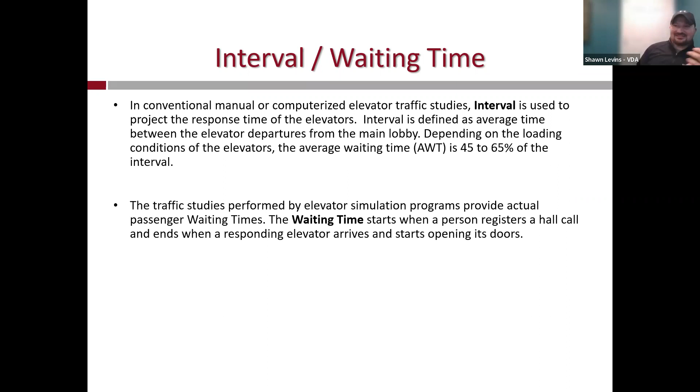The average waiting time is a lot easier to understand than the interval. The waiting time starts when a person registers the hall call and ends when the responding elevator arrives—exactly how it sounds. For your basic Class A office building, we wouldn't want to see an average waiting time exceed 25 seconds, so 20 to 25 seconds, with 20 being very good and 25 being on the lower end.

Residential buildings are a little less strict, so you have 25 to 35 seconds. For hotels it's 25 to 30, and for garages it's also 25 to 30.

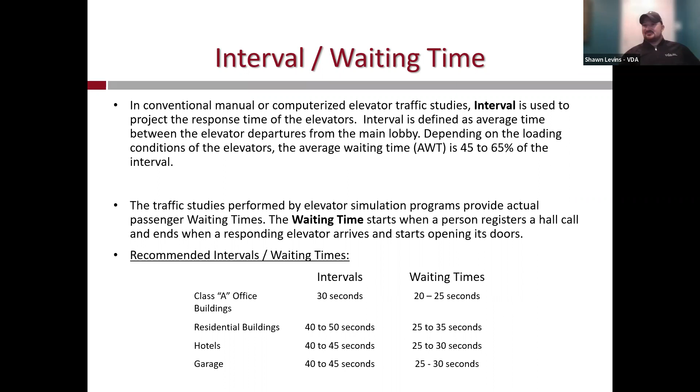Time to destination, again, is exactly how it sounds—basically the time the passenger spends registering the hall call to the time they're exiting on the destined floor. You want to see less than 90 seconds, and that's where the destination dispatch system really comes into play. Your time to destination significantly decreases when you have the destination type system in place.

Same thing with your car loading, right? We talked about the loading of a car. It's a standard 3,500 pound car, would be 21 persons. Have you ever seen 21 persons in a car? It's completely unrealistic, right? So 60% of that is about 12 people, which I still think is a little unrealistic. I don't think I've ever seen 12 people in there, but that's kind of what we look at.

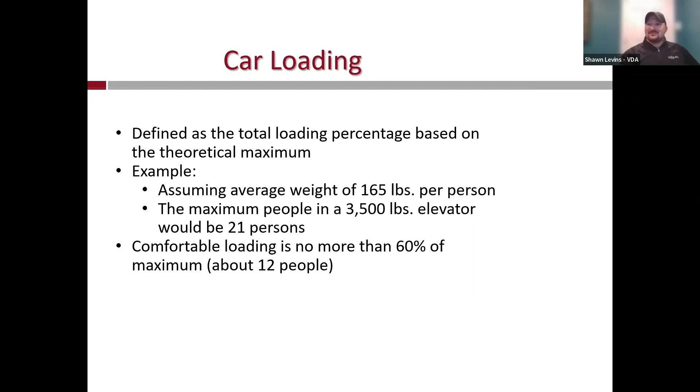And then also your population densities, right? Office buildings, 150, 225 net usable square foot. Population density for a lot of stuff that's being installed in new construction is all these lab and office mixed use, right? And we're seeing 175 to 225 net usable square foot population density. Typical single tenant office building in New York City, or at least what it used to be, was 150. And then to gather your population for your hotel, parking garages, residential buildings, we basically calculate how many parking spaces, how many rooms, or how many bedrooms per each person at those values.

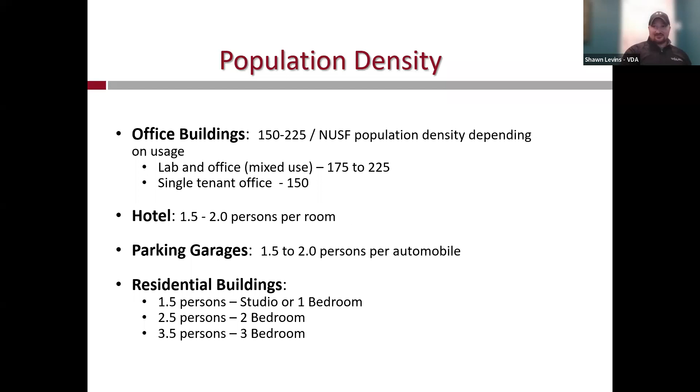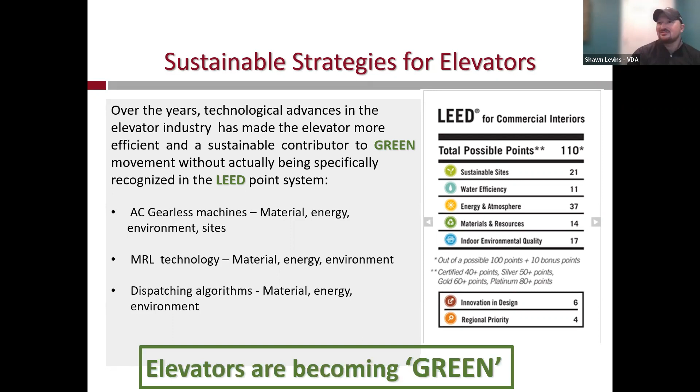All right, this is it, this is the last section here. So as we talked about earlier, elevators are getting more green, sustainable, branching off into the sustainable realm. With the gearless technology, with the MRL, makes things a lot more efficient. So they actually apply for some of the LEED qualification points, right? Material, energy, environmental sites, MRL technology, the dispatching algorithms with the destination dispatch. It's smart technology, a lot more efficient technology and everything else. So all these are good for the elevators becoming more and more green, which is good.

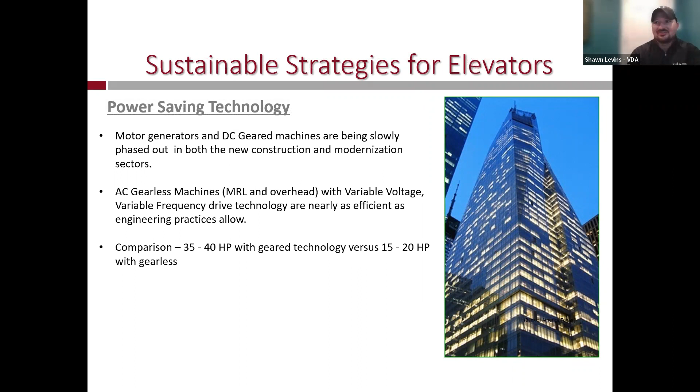Again, going through the power saving technology, right? You have the old school motor generators and DC geared machine, that would probably be about 35, 40 horsepower versus the gearless technology today, which is about 15 to 20 horsepower. So that's a significant decrease from what we were using previously.

And then what we have today is also what's called regenerative drives. The regenerative drives were always in place, so they would take this power created by the elevator systems and just disperse it through a bank of resistors - extremely inefficient. Why would you just not put that power back into the grid? So now they finally came up with the process of using that additional energy and dispersing it back into the grid. It's basically working against the elevator machine that generates the power with the empty car going up or the full load going down against the counterweight and the force of the machine, and they put it back into the grid.

Advanced technology, destination dispatch system. A lot of times when it first came out, it was marketed as it could delete one car, which is not true - you can't delete one car when you install the destination dispatch system. What it basically does is create an efficient travel consolidation type system for your elevators. So you can't delete one car, but you'll provide better service throughout, a better experience for your passengers. As far as deleting a car, it was marketed that way initially to try to sell it a little bit more, but now it's become more of travel consolidation.

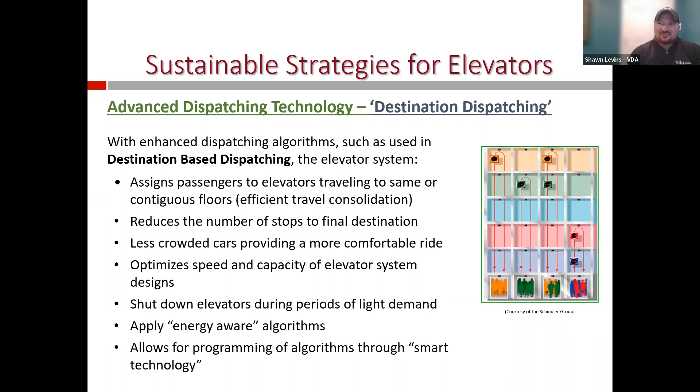Again, the different algorithms of programmable - everything's fully programmable through the smart technology. It's a smart dispatching system.

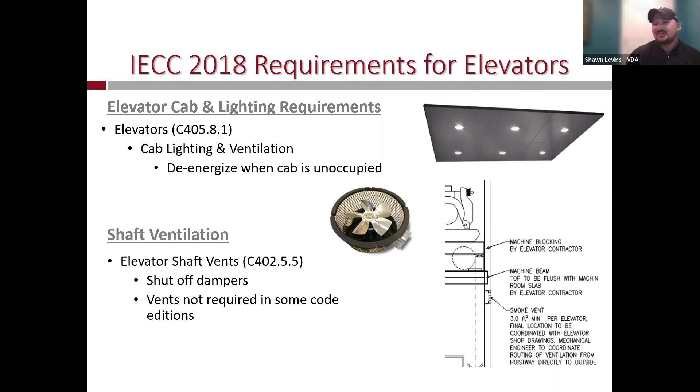This just goes over the energy code requirements, which pretty much all your elevators today that are installed meet. That's basically going to comprise your car lighting and your ventilation, so it should shut off when the car is not being used or unoccupied. With the shaft ventilation, the big thing that came in with the 9th edition was they basically removed it from the code. In previous installations, you'd have an elevator shaft which acts as a vacuum, pulling your cooled or heated air out of your building and exiting it through the ventilation in the shaft - extremely inefficient. So they allowed the mechanical designer to say they don't need it, or just provide a closed vent, which is a lot more efficient, conserving energy and that climatized air in the building.

All right, that's it. Coming up on the ringer here. So, any questions?

Shawn, I think we had one question show up on the chat that asked, what is the average cost of an elevator serving 2 stories?

Average cost of an elevator serving 2 stories is probably around $150,000 to $200,000. So it depends on the manufacturer that the job's being bid to, and it depends on how the job's being designed. The idea is to design for a competitive bid, so you want to design so that elevator can be installed and bid on by multiple manufacturers. A lot of times people will go to Otis Elevator thinking they have the largest dimensions, but they actually have the smallest, tightest dimensions. So you're basically sole-sourcing that job to Otis Elevator, and once they see that, they're going to increase their profit margin. That $150K to $200K elevator is going to turn into $250K to $300K, just because they know you're probably not going to change the hoistway dimensions more or less.

So if you structure it around a competitive bid, sort of like exactly what VDA does on multiple projects, then you're going to have the best pricing from multiple vendors. It depends on the vendors, their availability, what teams they have available and everything like that, but that'll give you the best pricing. Your finishes too are going to affect that.